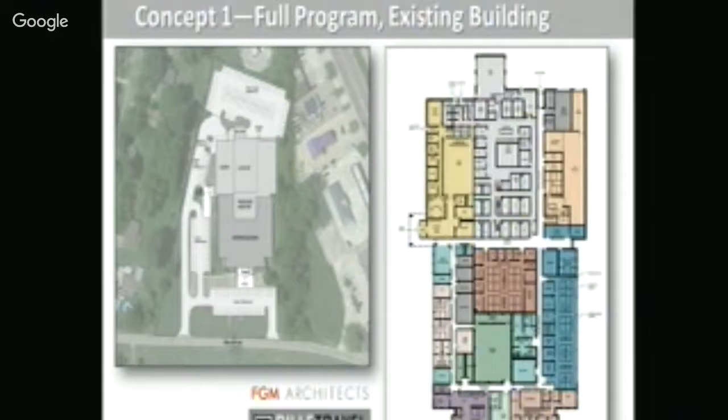Next. So in the RFP, we were asked to look at cost-saving ideas to help you meet the budget. So we looked at reducing the program requirements so that the addition would be smaller.

So what we did is, again, keep in mind these are just ideas, but our thought was to combine the lobbies for the police department and municipal court and do those as a combined space.

So again, the existing building here, we just have one combined parking lot for public with access here. And again, all of the staff and police department areas would be to the rear, utilizing the existing building for office type spaces and the additions for the more functional and secure spaces.

Because there are some constraints working within the existing building, the layout is for the most part dictated by the existing structure. It's got low roof heights and the existing utilities would need to be moved, upgrades would need to be made to the structure, et cetera.

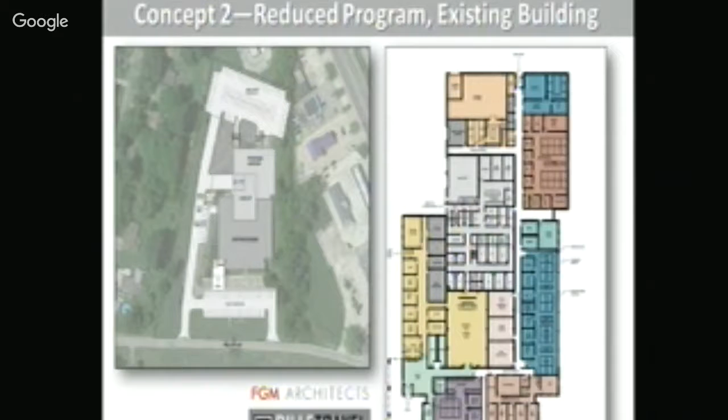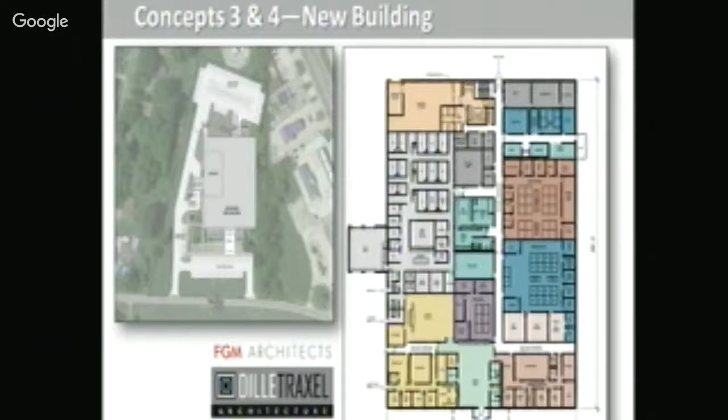We're excited to be part of this team and look forward to continuing to work with the city, police department, and municipal court to develop a cost-effective solution that meets your needs. And now I'm going to hand it over to Phil to wrap it up.

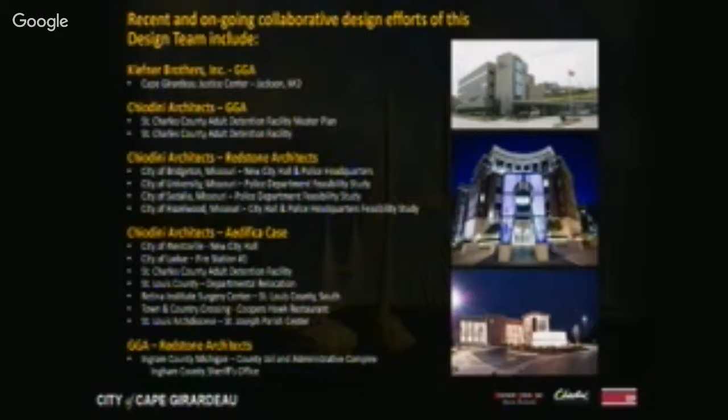I think it's important to point out the integral working together of all the teams that we have here. We've all worked substantially together. We're currently working with Redstone on the Sedalia Police Department, the University Police Department study, and we're also working on the Wentzville City Hall and City of Ladue fire stations with Aedifica Case.

We believe Kiefner's the premier commercial and institutional contractor here in Cape Girardeau. I think a lot of the hospital work, the technicalities and the delivery process for those stand out alone. As everybody's indicated, there's significant duration and tenure of the teams that we have.

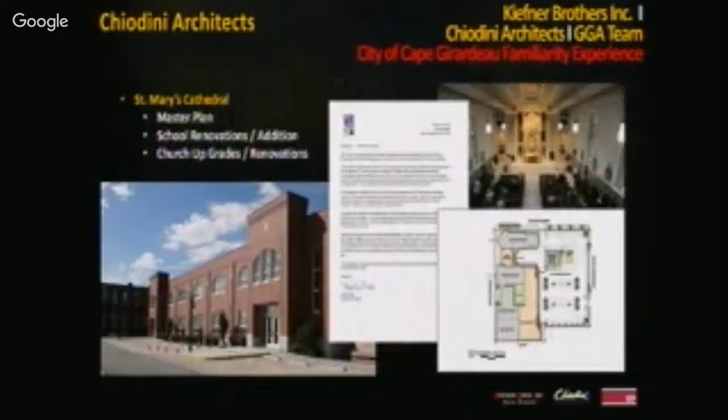These are lists of municipal public safety work for Chiodini, for Redstone Architects, GGA Architects. And then quickly some Cape familiarity - again, we know the significance of the architecture that Kiefner Brothers has brought to Cape Girardeau. Chiodini, again, with our familiarity with St. Mary's on 3 projects in a row.

I think our process and approach, as was indicated earlier, there's a lot of work that still needs to be done with getting together with the city, the police staff, and everybody, and working out the exact needs. It's a collaborative process, a collaborative balance between cost and scope. We need to vet the existing space needs analysis. As Tom was indicating, we believe that the program can be met in less square footage, and we want to maintain competitiveness through the process.

We haven't picked design build team members at this time. We're looking at fully engineering the project with input from significant subcontractors in the Cape Girardeau area. We want to keep the competitive nature of the process from the beginning until we bid the project. We believe the design build approach will allow us to fast track the construction and expedite the schedule. We like the design build approach because, as opposed to design bid build where the contractor only gets to spend a couple of weeks with the drawings, in design build our whole team will work hand in hand from the very beginning to the very end of the project.

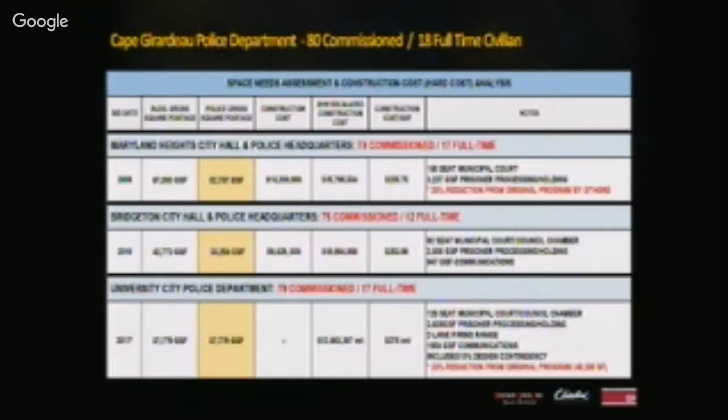The red numbers here show that once we establish the initial or vet the existing space needs analysis, our work's not done. We've achieved significant efficiencies on both of these projects, working down from the initial space needs analysis. That's part of our job, is to make this project as efficient as possible. The importance here is that these happen to be three police facilities, and they're almost exactly the same as your officer staff and civilian staff. This is why we're confident in being able to achieve an area reduction - they have all the same elements that you have in your present program.

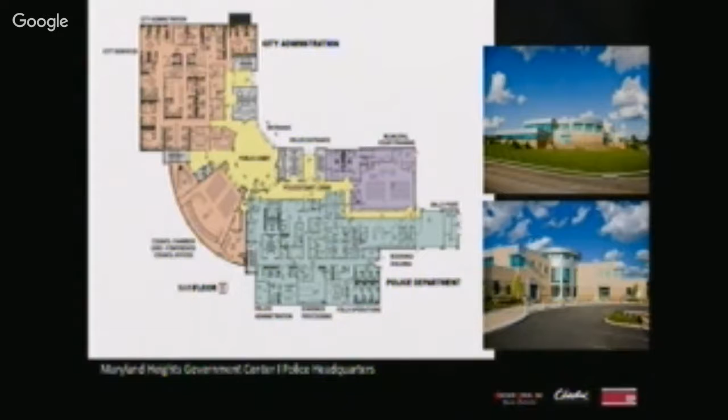This shows we're working currently on the Wentzville City Hall. This project was initially programmed by another architect at 54,000 square feet, and we did not see the initial program. Our initial program came in at 51,000 square feet. Right now, we've driven that down going into CDs to 42,000 square feet - I believe it's about a 16 or 18% reduction in the program scope.

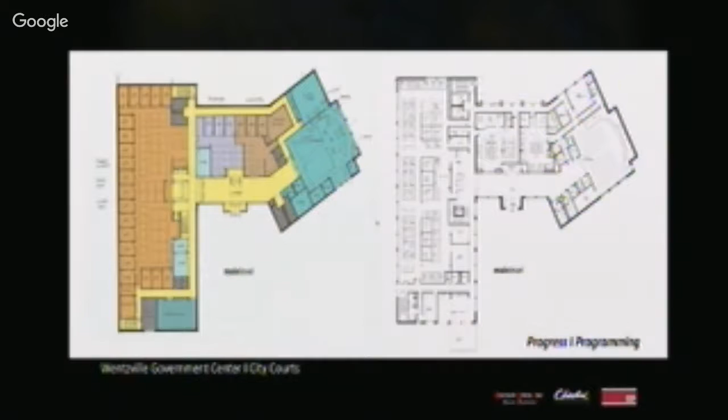This is an example of that. They started out with offices, just tons of offices. We've shown them the efficiencies they can gain. You can't really see it in this plan, but this building that we're moving forward with is about 20 feet shorter than the initial building because of the program efficiencies that we've been able to realize.

This is just a quick - Dan, do you want to? Sure, right.

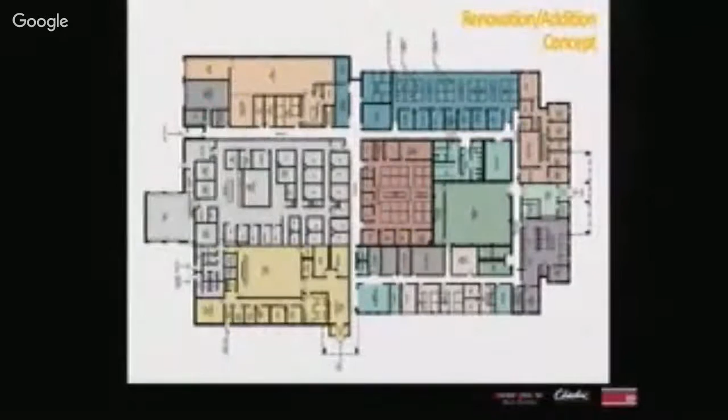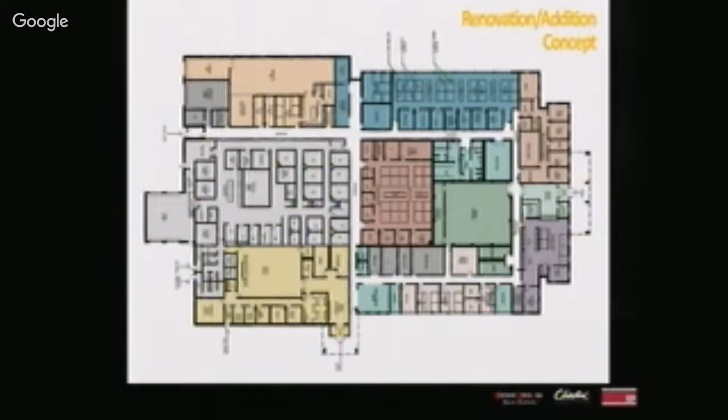This is the plan that was in the study, and I'm just showing it because that's what it is. It's an existing building. I think one of the issues with an existing building is that it probably doesn't meet the building code requirements for an essential building.

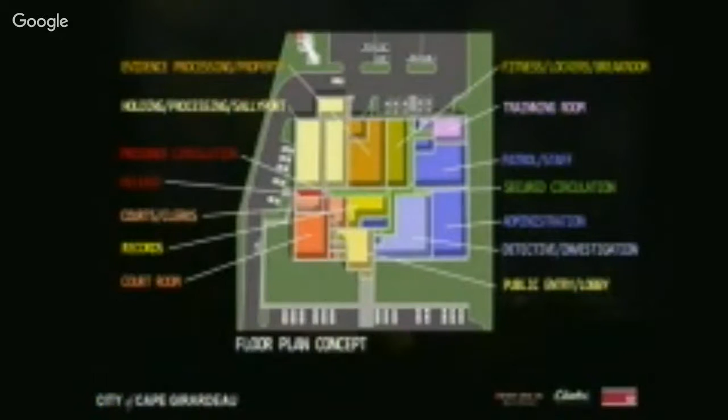We've developed a concept by taking the building down at the Armory building. One of the key issues and the exciting part about a law enforcement building is to create an efficient and secure police department operation, because these officers need to be secure and have - I don't want to say secrecy, but they have confidential information every day, whether it's on computers or on their desks, so they need to be secure. So what we've done is create a block of about 36,000 square feet to show some adjacencies and relationships. It starts with limiting and securing the public from the operations side.

So we have a lobby which will accommodate both the court and the detective bureau. In terms of wayfinding, coming in from the parking lot to the entry of the building is about the only wayfinding we really want. We don't want the public walking through the operational section of the police department unless they're escorted by an officer. So what do people come to the police department for? To go to court, to fill out a report, to get a report, or to be interviewed by an officer or detective, which we do up here in front. So we're limiting the public here.

On the site, we're limiting the public to the front of the building, and we have a site plan later. We've got secure parking in the back, the sallyport, the court, police, and patrol operations. The training room is very important - there's so much new training going on today that we've maintained that in the program.

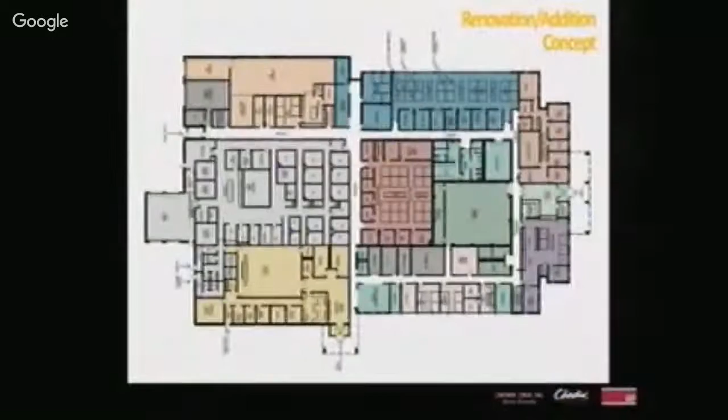One thing I would mention is the difference between the plan just shown and the previous plan. There's a simplicity that goes much beyond this one, and I think it's much more simplified in circulation, and the security is very secure. The green areas are the security. It's a very simple plan, but it's a very operationally effective and secured circulation area.

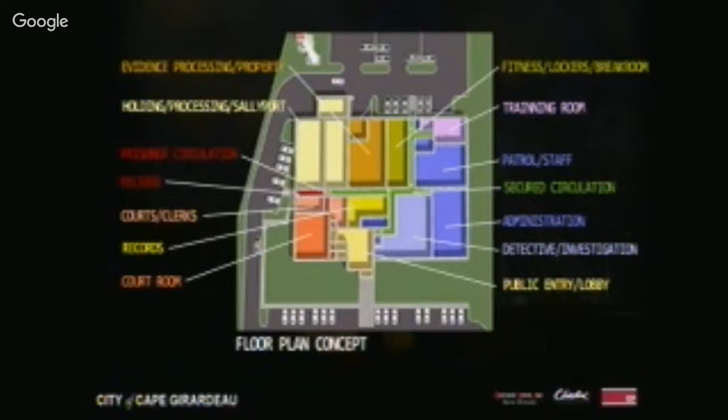And I want to say one other thing. The second part of the new police and law enforcement center and court is it has to be attractive and inviting to the public. In today's climate all over the country, we want the public to feel welcome at the facility, whether it's the court or coming to fill out a report or whatever. So we do that by creating a lobby design, welcoming and integrating Cape Girardeau's public policy to its citizens.

In point of fact, if you have local, state, or federal prisoners, and you're holding them for less than 10 hours, you need 25 square feet. Greater than that, you need 80 square feet. If you hold them longer, you need activity and day room space, because it's acting ipso facto as a jail, not just intake or lockup. These are the kinds of things that have to be paid attention to.

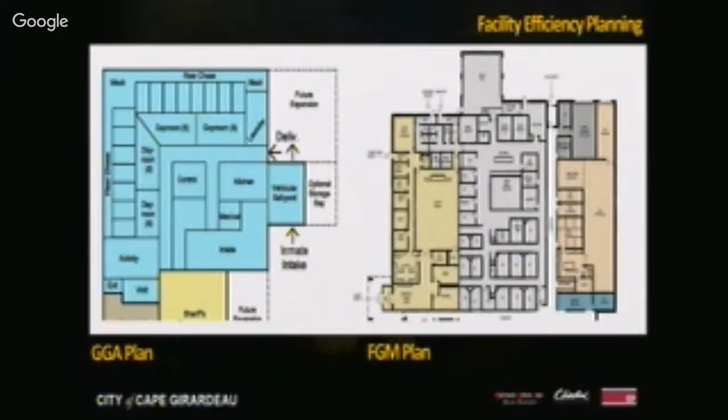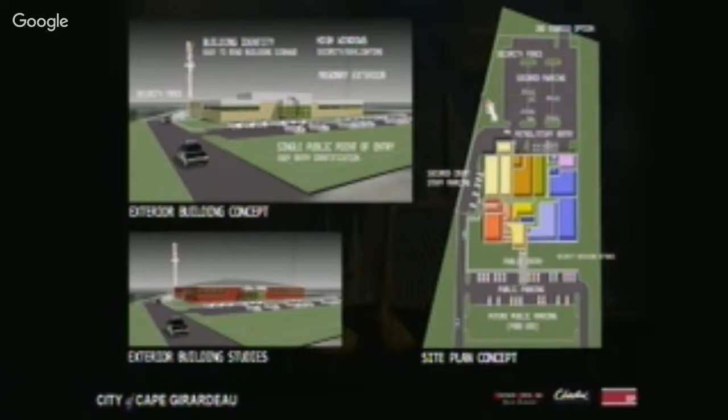These are just some images, some elevations we developed to help our clients with visualization. I think our graphics are among the best in the country. The programs we use for interior graphics really help our clients understand how the facility is going to look and how it's going to operate.

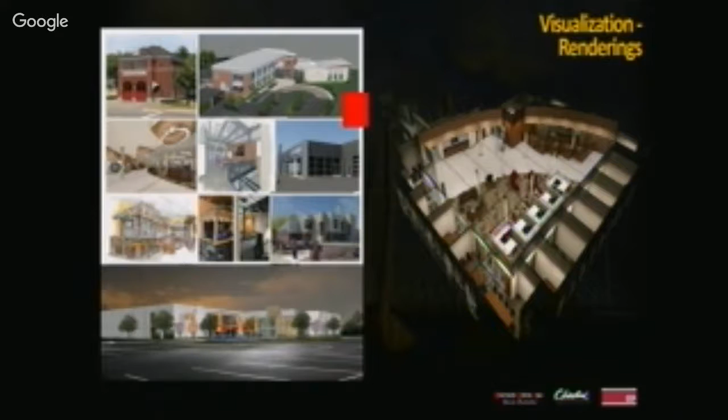Quickly in summation, we know vetting is going to be a main part, along with collaboration. We haven't yet sat down with you to see exactly how you want to work this facility, but we believe we can make it more efficient than what we've seen so far. We'll present alternatives and vet everything with you, maintaining communication. We feel we can fast track this project, with weekly design and construction coordination meetings. Paul, myself, and everybody on this team, all principals involved, will be engaged from beginning to end, from design and programming through the end of construction administration.

Again, we appreciate the opportunity. I'll let Tom wrap up here real quick.

Thank you, Chris. With Kiefner Brothers, what you see is what you get. We'll handle all of the pre-construction on the estimating and budgeting side, build the building, and do all the construction management. We've been around a long, long time, several generations old, and we expect to be around a few more generations. So hopefully, if you choose us, somewhere down the line some Kiefner will say we built that decades ago and that police station is still fine quality, still functioning, and still serving the great community of Cape Girardeau. We really thank you for this opportunity, and we look forward to the Q&A session.